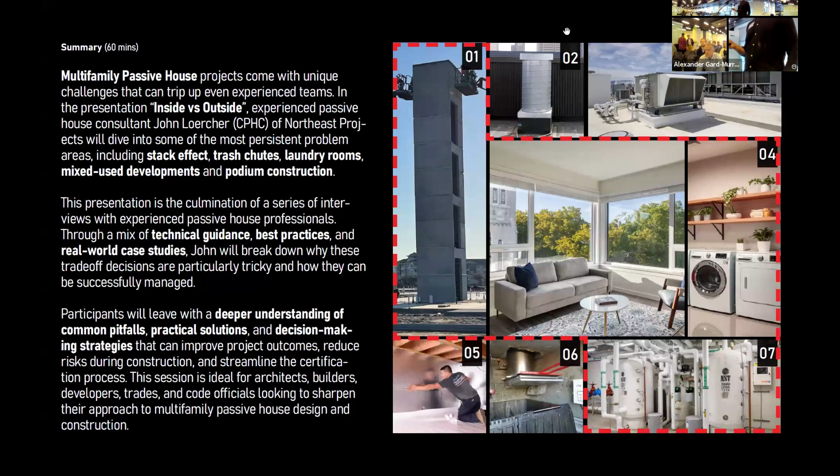Inside, outside - this presentation, as I was telling a previous student of mine, is basically a continuation of a research project that I've been toying with between my work at RPI, different scholarships and research initiatives, and now folding it into the CPHC training at Phius.

I'll go through some of these things quickly. Essentially, what we're going to be doing today is identifying and explaining some of the common challenges, specifically in identifying the passive house enclosure or passive house envelope, depending on terminology, within big buildings. We've seen a lot of this discussion in smaller single-family buildings, but we're trying to collect strategies being seen in larger buildings as multifamily residential really takes off, especially in places like Massachusetts. Even at the Phius non-res summit that just occurred, we're seeing a lot of larger non-residential buildings happening as well.

The second learning objective here is we're going to look at some real world case studies, based on work that's actually complete, final certified projects. We'll go through some technical guidance - even though we're not necessarily showing the same project case studies over and over again, the idea is to abstract some of these inside-outside principles so we can apply them to different projects.

Then we'll talk about how the Phius certification process really factors into this as well, because there's a lot of detail about what you choose to be inside, what you choose to be outside, how that affects design processes, verification processes, et cetera. Construction phasing is a big one here too.

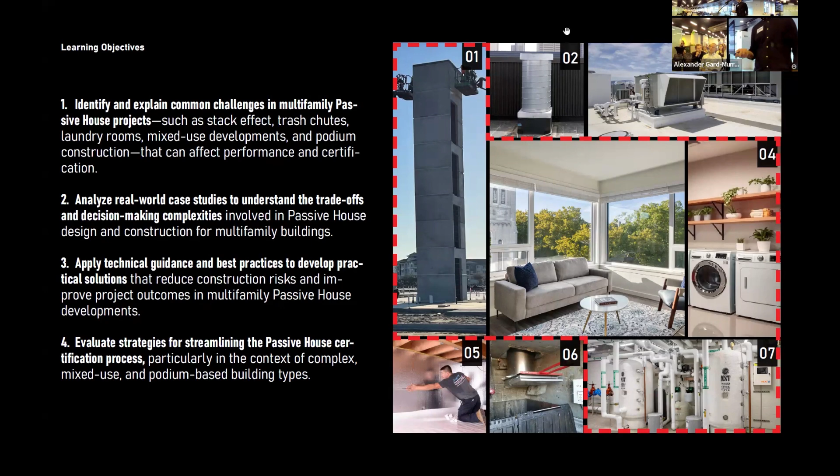Phase one is an in-person CPHB course, which will be released this upcoming July in Seattle. The first virtual classes of this new curriculum will be coming out in August, so please look out for that.

The new curriculum is really top-notch, and a lot of it is because we're not just focused on small buildings anymore. That's the number one comment from CPHC students: enough with the Larson trusses, enough with the tiny single family buildings, we need to learn how to do big buildings now. And there are a lot of differences involved.

Michelle was a contributor, James Peterson was a contributor, and a number of other people gave us their time and spoke about project experience to feed into this whole presentation. So now for the actual content.

First, we need to go through a couple prerequisites to get more specific with our language when discussing some of these issues. From there, we'll go into ground conditions, vertical shafts, and exhaust ventilation. These are basically the three categories I'm using to pull out some of these inside-outside trade-off decisions.

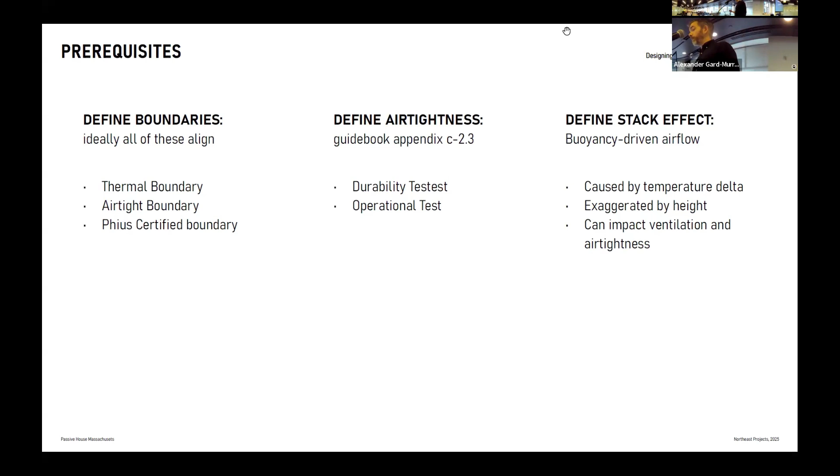Lastly, a really important thing: in big buildings, in all buildings, we deal with stack effect—essentially buoyancy-driven ventilation or airflow, because hot air rises. That becomes enough of a factor in large buildings that we actually have to start speaking about it a bit more, so we're going to talk about that as well.

One of them was a crawl space, the other was a mechanical basement. So even though they're not in our PHIUS enclosure, it doesn't mean we're necessarily off the hook for those—we still need to insulate, air seal, etc. So now we have these primary and secondary, maybe even tertiary boundaries that are all interacting.

We need to make sure we're tracking those both through design. How are our details being drawn to communicate this? How is our construction being phased to make sure these things are continuous where they need to be? And then how are we verifying those things?

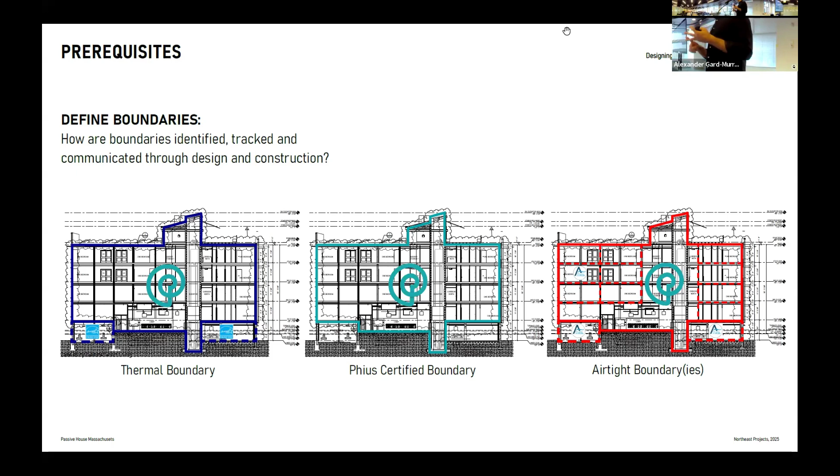This is where it gets really important to plan and really think in 3D. We've been seeing more 3D thermal bridge analysis, which is really amazing. But I'd say we have to take an even further step back and actually look at the massing of our buildings and the programs, how they fit together, to really understand where that mechanical room is that's outside of the enclosure.

How does that connect to a trash chute? How does that connect to the elevator, or not connect to the elevator? So we get this kind of complex Tetris game, especially if you have not straightforward ground conditions that really need to be tracked throughout all of this.

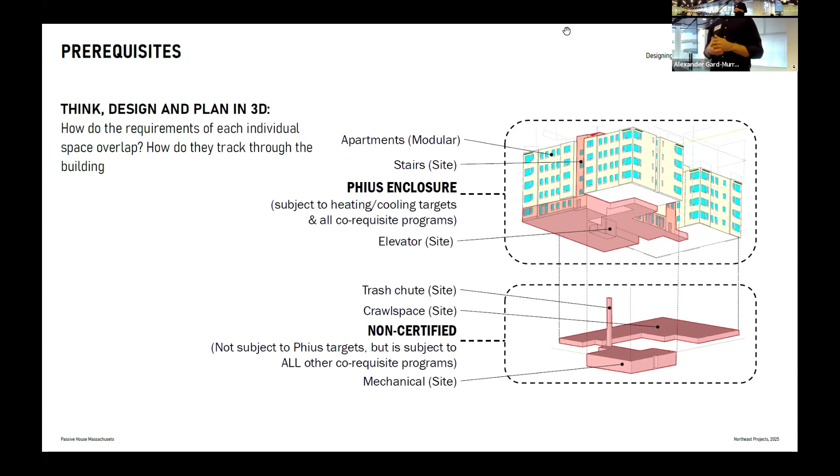Okay, so the next thing we're defining is air tightness. Most people in the single family world aren't really worrying about this so much, except for the PHIUS raters. I think this gets even more emphasized as a concept in larger buildings, because as we add more appliances and things that can actually be taped off in certain circumstances, that can add up to make a big difference in our building air tightness reading.

So we have our operational test first, and all of this is defined in the PHIUS certification guidebook, appendix C 2.3, if you're interested. The operational test is for everything in its natural position, so nothing can be taped, everything has to be how it is. This gets really interesting when we're talking about appliances, like a direct exhaust dryer, because if you don't have that purchased yet and installed, you have to leave that duct open for the testing, versus if you have it installed, you might be able to rely on the air tightness of the dryer itself to improve the overall air tightness of the building.

We also have our durability test. This is the tape test that we're going to hear about from our PHIUS raters and verifiers. This is also what we're using for the WUFI or the PHIUS targets. It's important for the CPHCs to understand that the number we're plugging into WUFI at the end is actually based on that durability test, which is our taped test. Having that number, especially in a large building, these two numbers could actually be quite different. We need to know as CPHCs which one of those we're pulling into our energy model to show PHIUS compliance.

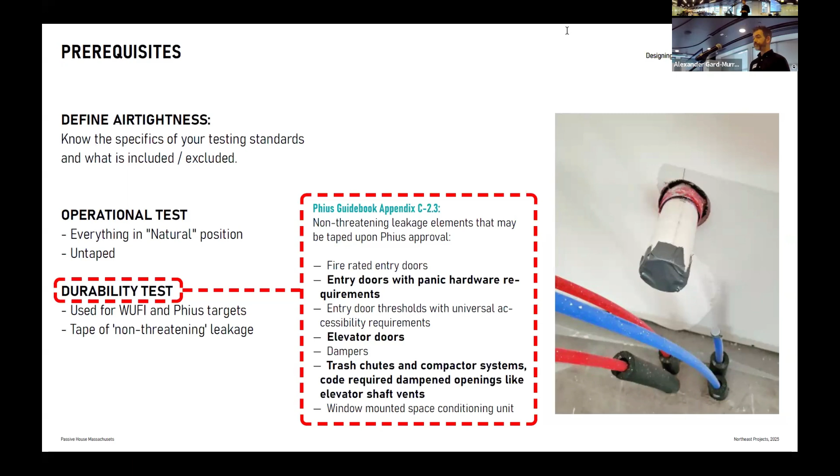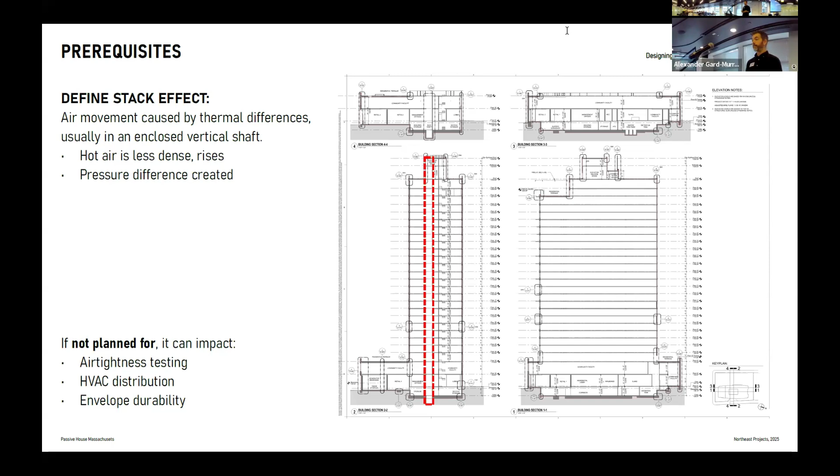Okay, and the last prerequisite I want to speak about is the stack effect. This is a section from 425 Grand Concourse. You can imagine any continuous vertical shaft in a building like this is going to be dealing with some degree of stack effect. This is based essentially on airflow from over a vertical shaft and a difference in temperature between the top and the bottom of that shaft.

It's also important to show that the stack effect isn't going to be a uniform effect applied to the whole building equally. It will actually have positive pressure in some areas, essentially the top half of the building, and negative pressure on the bottom. So there's going to be certain exchanges or interactions that happen as you're going floor to floor through the building. That magnitude of pressure might not be so bad in the middle of the building, but it might be something that really is causing a problem towards the top.

So you can imagine you put an ERV on the top of this building and you're ventilating all the way down to the first floor. At a certain point, you're dealing with going against positive pressure, and then you hit another point and eventually you're dealing with negative pressure. I'm not an engineer, so these are just the basic fundamentals here, but you can imagine how this would become an issue in a project.

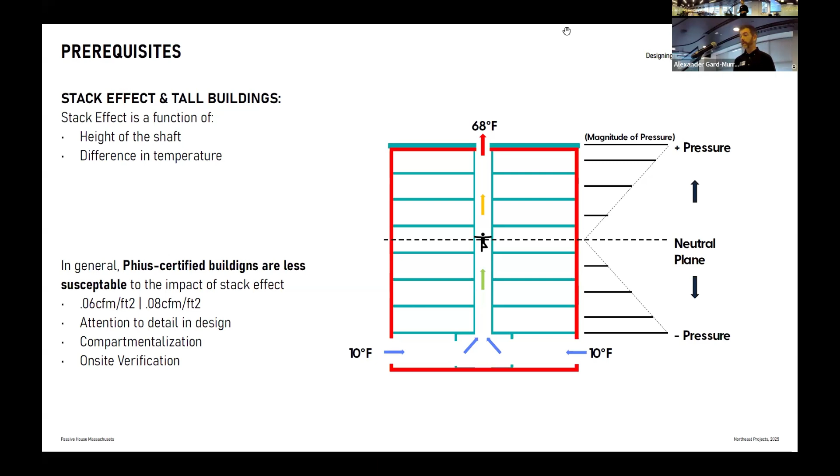Again, passive house buildings are generally less susceptible to this in general, but we will still open windows. We're going to be dealing with elevators going through your PHIUS enclosure down into a parking garage, and we need to be aware of this effect. It's only going to get worse in more extreme environments. So a milder environment or outside temperature range, you're going to have less stack effect. If we have a lot of internal heat gains and a very cold temperature on the outside, we're going to deal with more stack effect. So it's going to be very climate specific, just like all the other PHIUS protocols.

So those are the prerequisites, the things we need to define in order to discuss the rest. The first main category I want to go into is our ground conditions, starting at the bottom and working our way through the building enclosure.

Bringing back some of those diagrams from earlier, if we look at basements and crawl spaces first, we're seeing in more and more multifamily larger projects that there are spaces cut outside of the Phius enclosure, the certified enclosure, within the building. This might be occupant storage spaces, bike storage, some mechanical spaces, garbage chutes and garbage compactor rooms.

In this particular project, Lamora, we had a crawl space because it was modular, so we needed these piers for the modules to sit down on. Going back to that Phius enclosure was really important. When you conclude you're going to cut a space out of the Phius enclosure, it's easy to think you're off the hook and don't have to worry about this space, but that's actually where you have to start deferring to some of the co-requisite requirements.

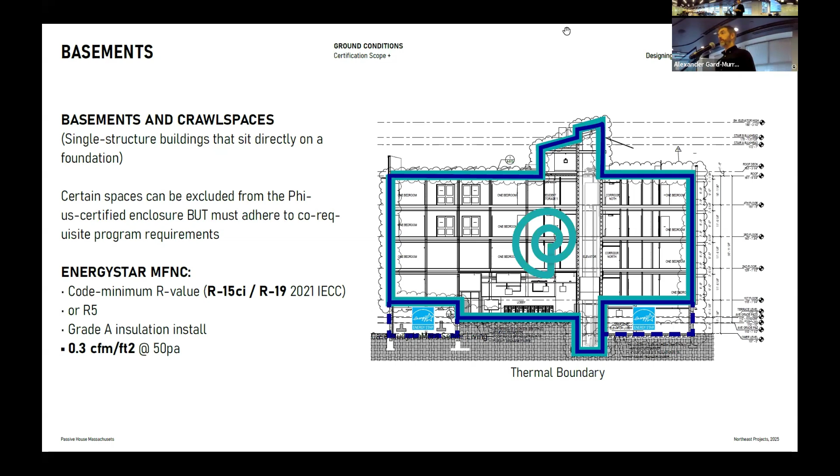The Energy Star multifamily requirements aren't too burdensome. They have a code minimum value, and if code doesn't prescribe that, they say it must be at least R5, so you do have to do something regardless of what building energy code you fall under. The two more significant things are that you still have to pay quality attention to how your insulation is installed, you can't just do a quick and dirty job down there, and you still have to meet the Energy Star requirements for air tightness. These are all areas of additional detail and concern.

On top of that, we still have the EPA Indoor Air Plus requirements. Again, not a Phius certified space, but we need to deal with that air tightness limit, compartmentalization, duct leakage. And there are actually some pretty specific requirements for moisture control, humidity control, and ventilation.

Even in the case of this project, we just have this 3-foot crawl space with a bunch of piers, but now we have to condition it. We need to dehumidify it, insulate it, vapor seal it. So the trade-off is, was it really worth it to do that? The conclusion's kind of still out.

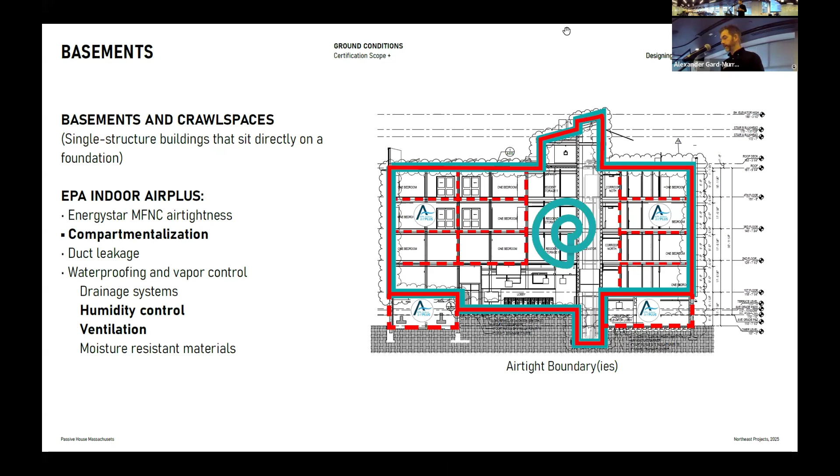Okay, so those are for some basic conditions. Obviously we need to deal with podium construction as well for large buildings, a common typology. The first one at Phius that we really saw was, well, actually 425 Grand Concourse was where this really started to come into the perspective as something we really needed to figure out a little bit more.

Podium construction, or pedestal or platform, is essentially when we get division in structure. There are fire resistance benefits in that we get a very robust, fire-resistant structure on the bottom, and then we can switch to a lighter construction type up above, which is more cost effective. Typically on the bottom in that fire resistance section we'll see something very conductive, like concrete or steel, whereas up above we get our more standard, maybe wood, thermally broken, more thermally durable details.

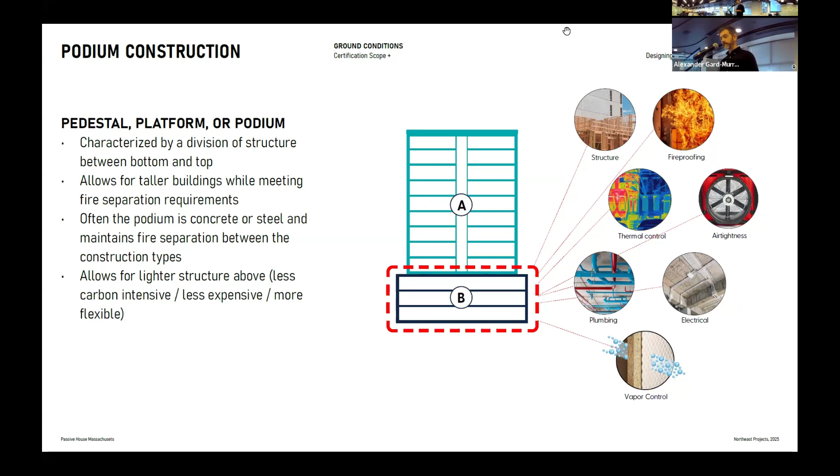We're essentially given this trade-off decision where we either have to insulate below that podium or insulate above it, and it has pretty significant impacts on how we actually detail this. Finch Cambridge is on the right here, and on the left is Barry Farm, contributed by Michael Hindle. You can see the dashed navy blue line is the podium slab, and the red dash is where we're actually pulling that insulation down to interact with the slab itself. So we have to deal with utilities that are potentially either interfering with this insulation space or penetrating through it.

Essentially, either way is not totally perfect. There's going to be certain transition details that you have to deal with on either side, especially how to penetrate and seal, considering those fire ratings. Dealing with corrugated steel deck, that's not necessarily a flat plane, so you have to think in 3D.

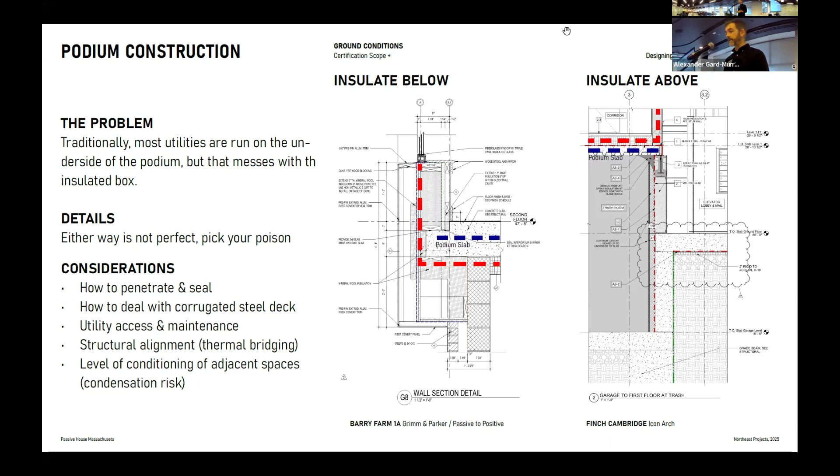Structural alignment: can we actually design a building that has a structural offset when we transition from the top of the podium to the bottom of the podium to help reduce thermal bridging? All of these three-dimensional thinking aspects really start to play into these decisions.

Insulating on top will certainly simplify our air sealing and thermal continuity, and it tends to be more forgiving with thermal bridges, because we just get a nice insulated box and sit it on top of another box. But as this diagram shows, that's not always the case—there are elevators, service shafts, different reasons why we have to penetrate through that podium, and that's where these tricky details start coming up.

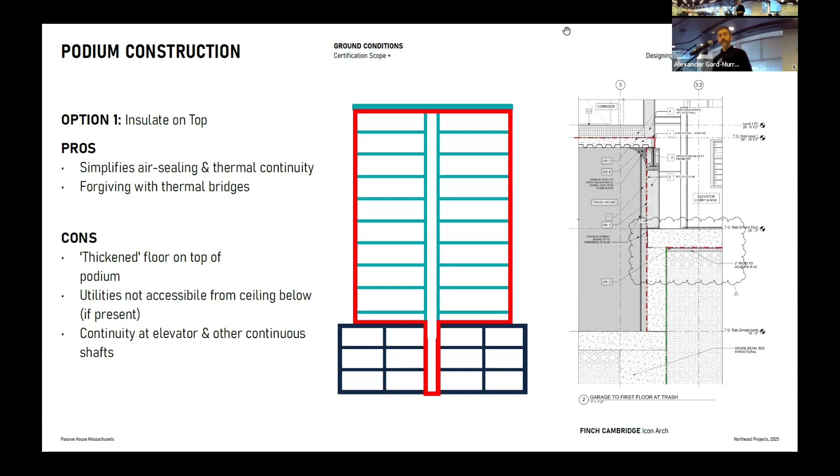The downside is that we're already fighting for height in our buildings, fighting to get the maximum amount of floors within our zoning limits, but now we have to add additional thickness to that floor. So that transition from podium to up above really ends up taking some space. We might cut off access to our utilities from the ceiling below, and now we have a situation where we have to access utilities from the floor, which is not ideal from a building maintenance perspective—and again, that continuity of all the shafts through the building.

Our second option would be insulating below, and as you're dealing with the structure, this tends to get a little more complicated. You're going to have to break that continuity of insulation as you go from top to bottom, just to pass through that podium top. You also have to deal with all of the structure of the podium itself—if the underside of your slab isn't completely flat, you have to make your way through all that kind of origami. The pro is that it does eliminate some of that additional building height, essentially collapsing that height if that becomes a challenge or constraint you're already working with in your design.

And a lot of the other air sealing difficulty around deck, et cetera, is important here as well.

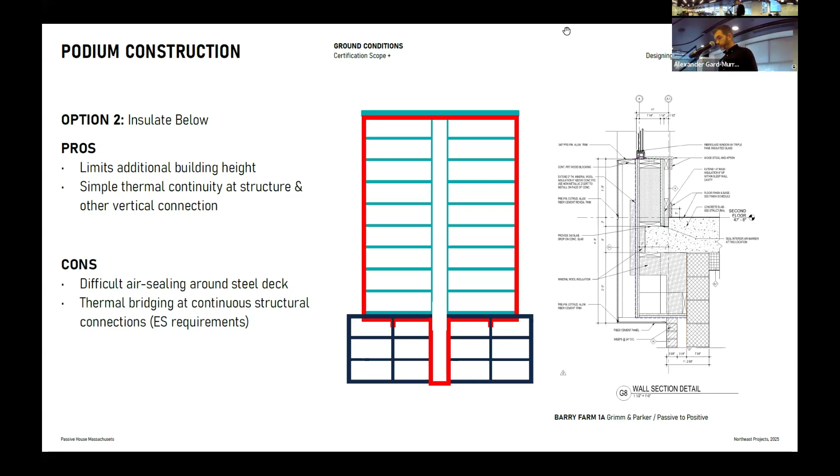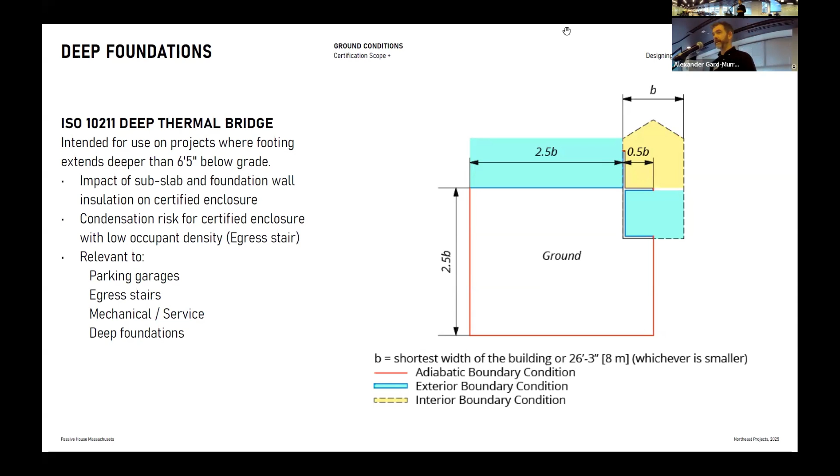One last thing about our foundation conditions: we're starting to see the limitations of the current PHIUS perimeter thermal bridge analysis that we recommend. There's a new protocol now for PHIUS deep thermal bridges, following ISO 10211, which widens the scope so we can account for multi-story parking garages, et cetera. It's based on the width of your building—the wider it is, the more ground you have to model in your thermal bridge condition. It has given me significantly different results in my thermal bridge analysis, so I'm recommending this to all project teams. If you want the protocol and it's not on the PHIUS website, let me know and I can send it.

So we established the ground conditions, the inside and outside spaces, as we start to build the building up, and eventually we get to our residential, more repeatable units. But we still have to have things go up and down through these repeatable units.

If you come from an architecture background like I do, there's a lot of poetic language from writers about these vertical shafts. One of my favorites is Reyner Banham, from University of Buffalo, talking about the Larkin Building, one of Frank Lloyd Wright's buildings, calling it a stupendous piece of rationalized architecture and a triumph of industrialization.

He's really romanticizing this vertical transportation, a utilitarian aspect of the building. So I'm trying to make a play for how we can make these mundane mechanical parts of buildings, like trash chutes, a little bit more interesting. The detailing aspect is really what makes me say, okay, fine, I'll work on the trash chute detail today.

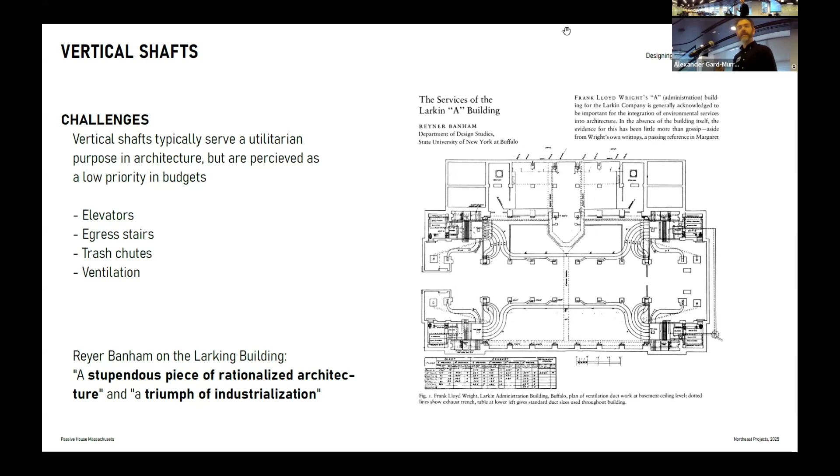So talking about these things with this mindset, specifically the things we're really dealing with are elevators, egress stairs, trash chutes, and ventilation.

I'll say off the bat, elevators are easy. There's really not much reason to cut them out of the certified boundary. Some early multifamily buildings in PHIUS certification did cut them out, as well as egress stairs, and I'd say probably to the project's detriment. I haven't found much reason to cut these out of our certified enclosure unless the building already has such low density that it somehow needs to shave off interior space—again, usually not a fit for PHIUS projects.

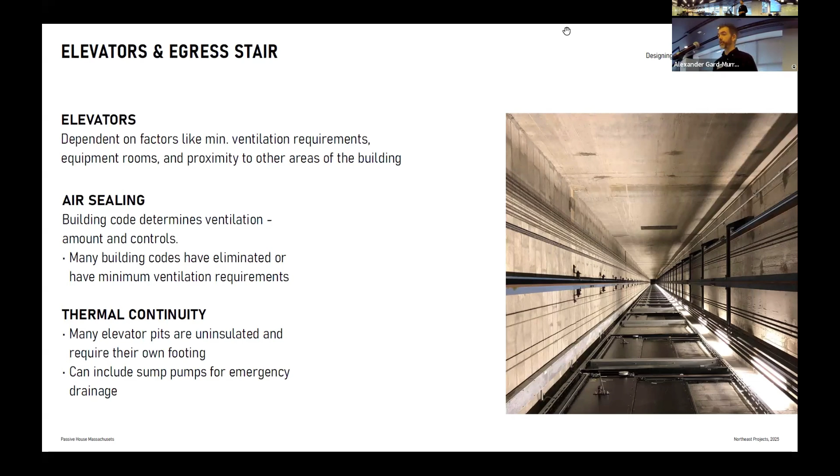The big thing to look at is just verifying ventilation rates at the top of the elevator. Most building codes we're dealing with now have minimal or no ventilation requirements at the top of the elevator shaft, so it's not really an issue. This is a theme we'll come back to with trash chutes, which are quite the opposite.

Egress stairs, very similar—the thing to look out for is that even though it's part of your PHIUS enclosure, and I'd recommend keeping it part of your enclosure even though it might come all the way down to the ground floor, you don't necessarily have 68 degrees Fahrenheit heating and 77 cooling in an egress stair, especially when it comes down multiple floors.

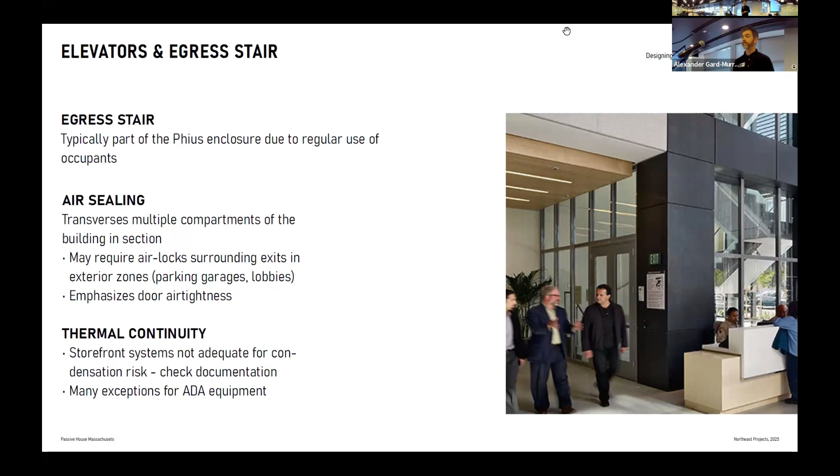So we're looking for thermal bridging potential and condensation risk, especially in areas we say are fully occupied but aren't really fully occupied sometimes. Looking at occupant density and actual usage of egress stairs can get important. I've seen many egress stairs going down a couple floors actually fail condensation risk analysis under the ISO standard, just because it's so far away from the rest of the conditioning systems of that building. But generally, elevators and egress stairs are simplest to just keep inside the building.

Now, trash chutes, the cousin of our elevators, are going to be a lot different, because we need to maintain a negative pressure to get all the trash odors out of the building. This is very much split right now as far as what practitioners are doing. Some people are literally cutting that trash chute out of the PHIUS enclosure—we call that the donut hole approach.

As you can imagine, there's a big challenge in that. Now you have a piece of your exterior enclosure on the inside of your building that you have to crawl up to make sure everything's continuous. There's also liners that go in there, and it's trash, so it's going to get banged up inevitably in the process.

We also have option 2, which is all out—considering the trash chute outside of the PHIUS enclosure. All in, we're seeing more and more. The all-out approach, I thought, was kind of a fear-based approach that a lot of people used early on in these big buildings. We're seeing more brave practitioners now—probably Galen Staengl is one of them—really forwarding the idea of just keeping the trash chute in the enclosure. He was very encouraging, like, yeah, it's possible, let's figure out how to do this, which we'll go over in a minute.

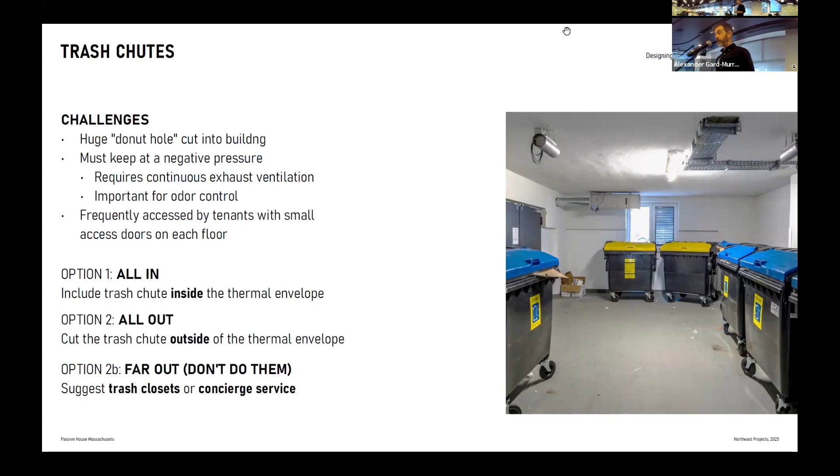The interesting one I call option 2B, the far out—just don't do trash chutes. Get a trash service or something like that. I'm not going to give it too much lip service in this presentation, but there are project teams that are legitimately pursuing that.

So for the inside, and I think this is the more interesting approach that I would really love to try out on a project, essentially we just keep our simple enclosure around all six sides of the box. We keep our trash room, the compactor room at the bottom inside the Phius enclosure, and then the trash chute is inside the Phius enclosure.

The downside of that is we have to continuously ventilate out the top, which is creating negative pressure. So what is essentially being proposed in a strategy like this is putting its own ERV at the bottom in that compactor room, which relieves some of that negative pressure by making that a balanced space itself. So you have the bottom being a balanced space, and then you're dealing with really just the shaft.

You're essentially sucking in air from all of the trash chutes themselves, so you have that airflow coming in from the individual floors, making its way to the top, and then out the top. If we can actually quantify and minimize that as much as possible, really just sticking to the code minimum, depending on the size and density of the building, essentially you can determine that it's an energy hit that you're willing to take.

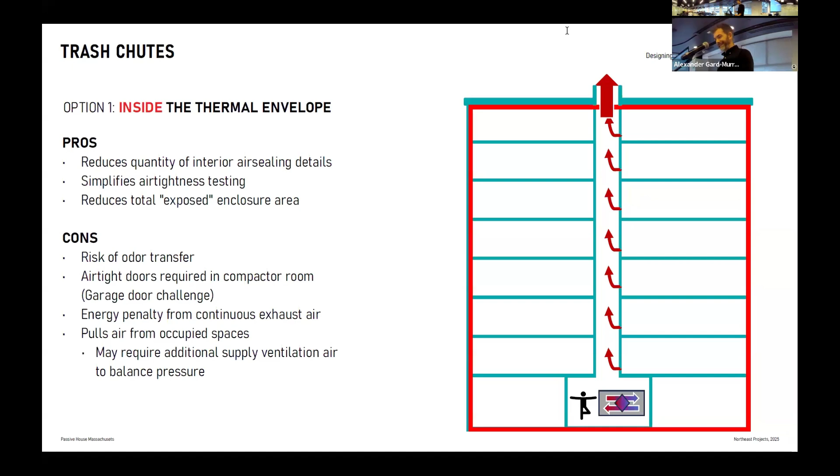Yeah, I think that's it for that slide. Okay. There we go, that's a little redundant.

The second approach here would be putting this outside of the airtight boundary. This is actually what I have some not-so-great experience with. It ended up being fine on the projects I've done this for, but not without a little help from AeroBarrier and Aeroseal. It just gets really, really tricky to seal that shaft all the way up.

So this is a positive because it minimizes odor transfer. It minimizes the thermal loss aspect, and also the energy loss of that continuous ventilation. It's just its own isolated kind of area.

That creates a lot of problems at the bottom, at the trash room, because now you need... I'm sorry, you do not need airtight doors for this situation, which is great when you get these big rolling, overhead doors that are just really a bear to air seal.

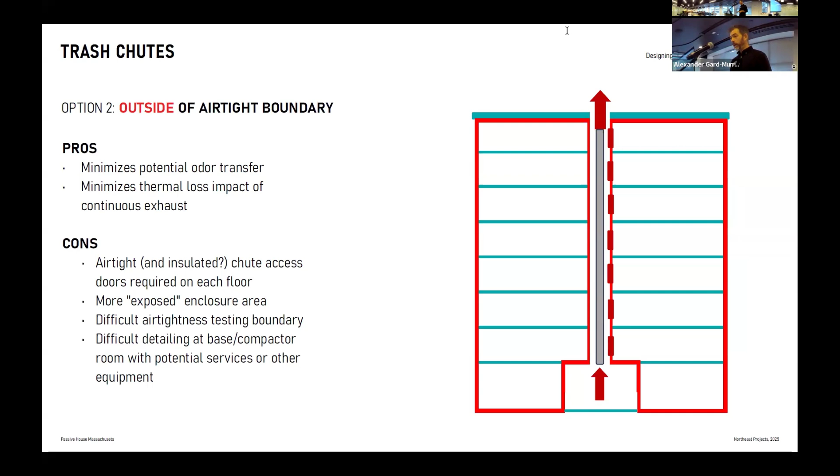Now, the last type of vertical shaft is really when we're thinking about centralized ventilation. So essentially, as we're dealing with both providing the same amount of ventilation down sequentially, down a vertical shaft, as well as dealing against that stack effect ventilation, we need to come up with some sort of balancing strategy.

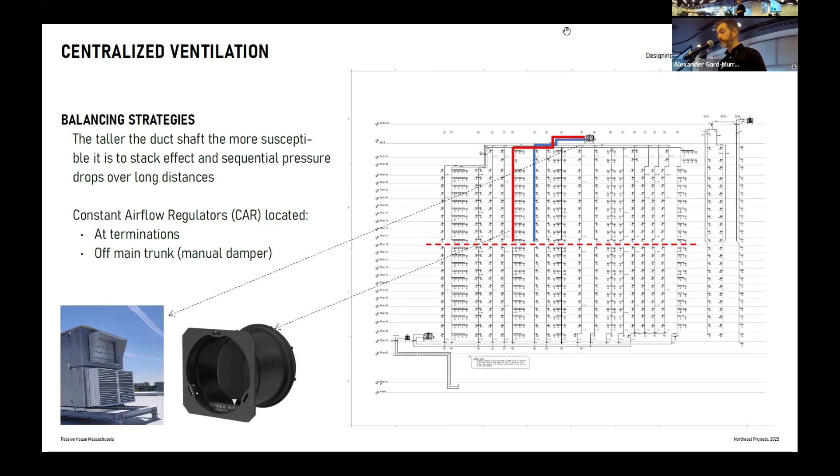So the taller the duct shaft, the more susceptible we're going to be to stack effect, even though that air is isolated in a duct. Primarily we're using constant airflow regulators to do this work, but there's still kind of smaller strategies within this CAR damper strategy, so that's what we're going to go into here.

There's a big debate out there, and this is where I'm hoping James can maybe chime in later, about the use of automatic or manual CAR dampers, self-adjusting CAR dampers versus manually adjusted CAR dampers, but also where in line in the ventilation system these are actually located.

So in the first option, option A, using an automatic damper at each individual termination, you're going to have more of these CAR dampers, but they're accessible right at the actual diffuser itself. Whereas a different option might be just using a manual unit floor to floor, and that allows you to manually go through as you're testing and commissioning the building to essentially, in a less nuanced way, start to manage every 10, 12 feet or so as you're going down the stack of the actual building.

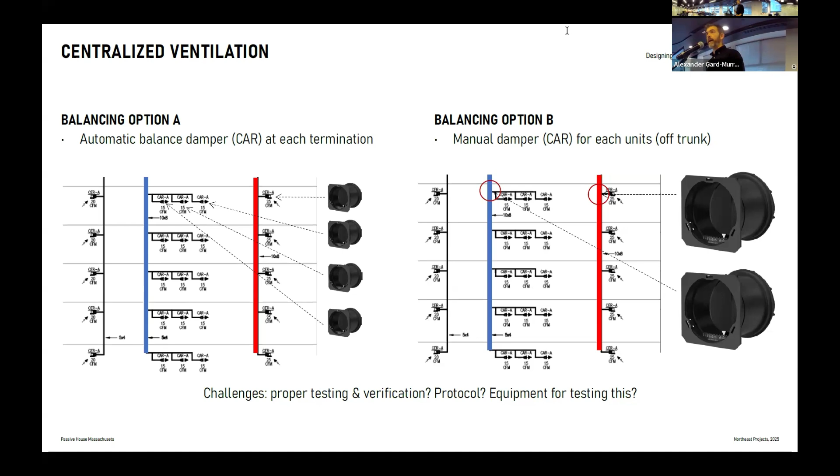I'd say this is worth bringing up because even though some of these solutions are fairly obvious, the real challenge is in what is the proper testing, proper verification, and proper equipment to use. This is probably one of the most open questions for me reviewing projects with PHIUS—as projects get finished, what is the most effective strategy here? It might even come down to team preference.

And then there's always the option of just not centralizing your ventilation, so you're not dealing with this shaft issue by even semi-centralizing your building.

At least in the previous version of the CPHC, we talked a lot about individual units in multifamily buildings—unit by unit ERVs or ventilation systems, versus centralized. We're starting to see more projects with semi-centralized systems, where there might be a ventilation system per floor, or as we're seeing here, a set of three floors, based on the capacity of the ERV.

What's nice is we can start to overlay this with the compartmentalization strategy for the building, or the blower door testing strategy. So we're collapsing the work of the verifier who has to figure out how we're going to test this thing at the end, and the design professionals upfront figuring out compartmentalization for Energy Star. We're bringing them together so it's working as one clear system from start to finish.

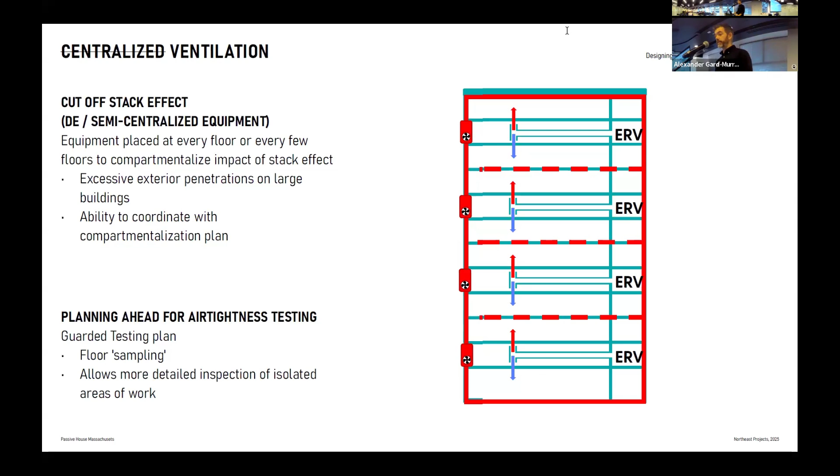This is really my buddy Tony Lasanti, the PHIUS QA/QC manager—he always hammers this in: get the verifier in early, get the verifier in early. Having them walk through some of these air tightness and testing strategies with you can actually lead to great streamlining in the design process.

All right, coming to a close here. These next ones I'm going to go through a little quicker—a lot of the same stories we all hear, and I know you're all pretty experienced in this room. Exhaust ventilation.

The field of indoor air quality and exhaust ventilation is constantly changing. In the past couple years, we've seen a lot of reports about indoor air quality and why we need to be direct venting our kitchen equipment specifically. We're dealing with things like energy loss through exhaust ventilation, how that impacts air tightness as we seal our buildings, makeup air—bringing cold air in to maintain balanced pressure—and in bigger buildings, what equipment is even available to us, since heat pumps aren't necessarily available for commercial venting equipment.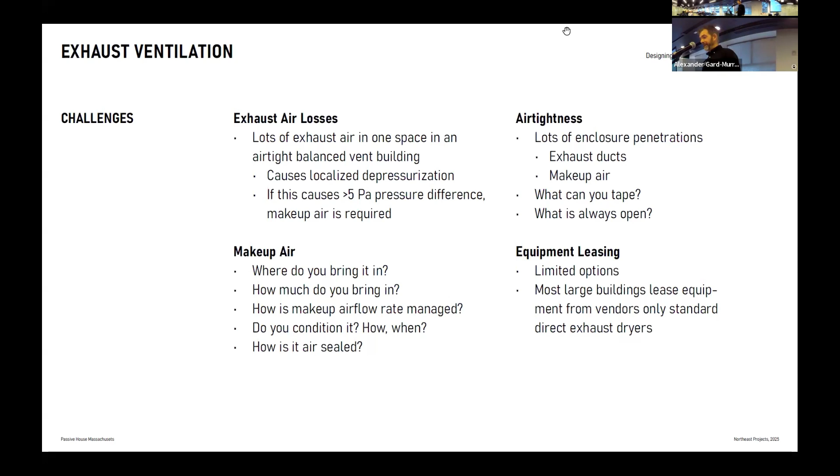I actually think it would be a great business idea to just lease heat pump dryers for commercial buildings, but that's another idea for another time.

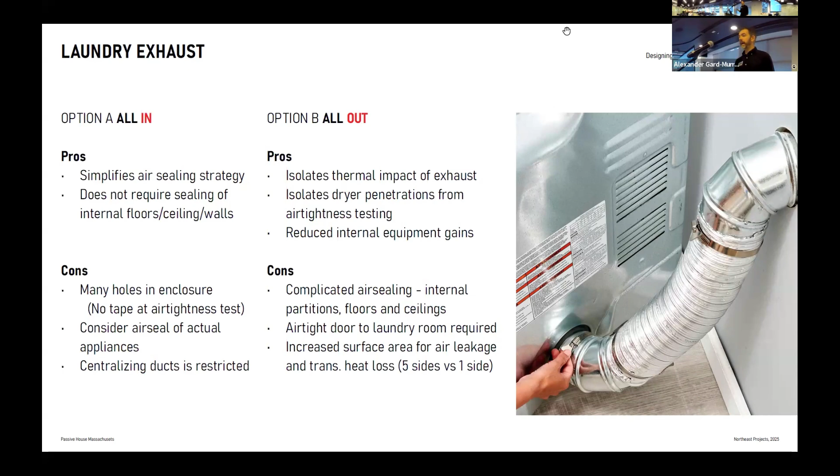Our laundry exhaust—we're really looking at all in and all out. This gets really interesting for me, because it's a very classic problem in passive buildings with direct exhaust dryers. In single family, we just put in a heat pump dryer, easy, but that's not always the case for larger buildings.

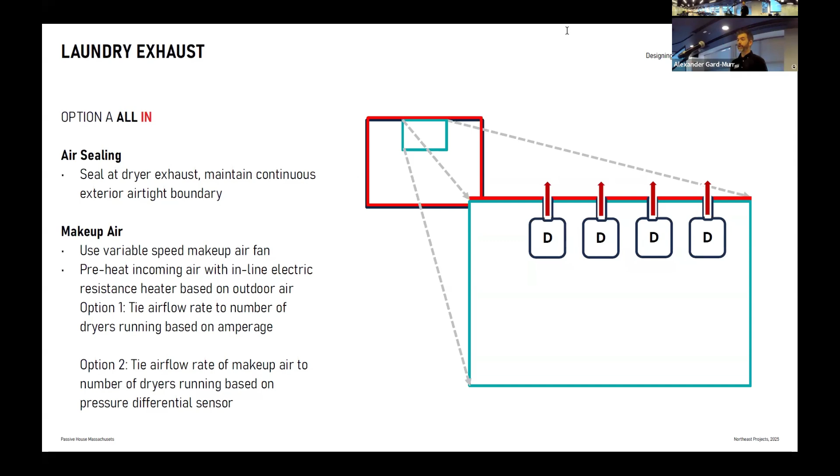So probably the most streamlined way to do this is just keep it inside the passive enclosure—you're dealing with a couple dryer vents, you have to seal all of them, and you probably have to do makeup air and bring cold air in to balance the pressure in the building. We're starting to see some variations of this.

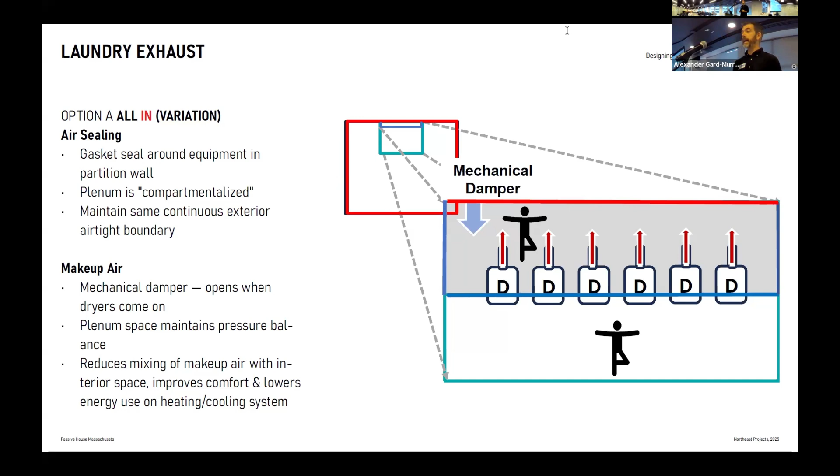But it's drawn very simply here in this diagram. It's not that simple, right? You need to build the wall so your dryers can fit into it. It needs to be gasketed around the dryers. So there's a lot of figuring out that needs to occur. But this is, at least from a comfort perspective, a solution that we're starting to see in some projects.

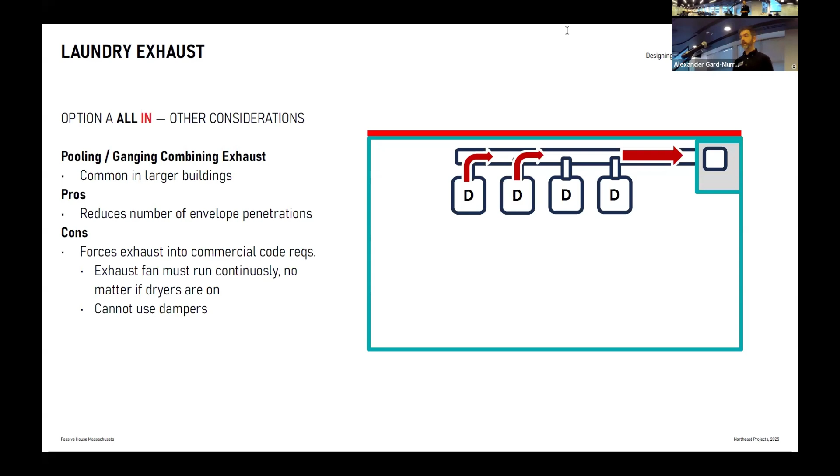There's a lot of questions about, well, why don't you just centralize your dryer vent? Then you just have one penetration through the building. That will put you into a commercial exhaust requirement, which is going to trigger some things like continuous exhaust, not using dampers, etc. So we have to be careful with how we're designing these as well.

There are some projects, especially earlier on in multifamily buildings, with kind of a fear-based approach here where it's just like, all right, forget about these washers and dryers. We're going to cut them out of the PHIUS enclosure altogether. This makes a big difference in the certification process because you just don't have to deal with it, right?

But from a constructability perspective, is this really the right decision? Now you're taking five sides of the box that you have to air seal and you're bringing that air barrier inside. You need to seal the doors into that laundry space. So it gets a little bit more complicated in order to do this.

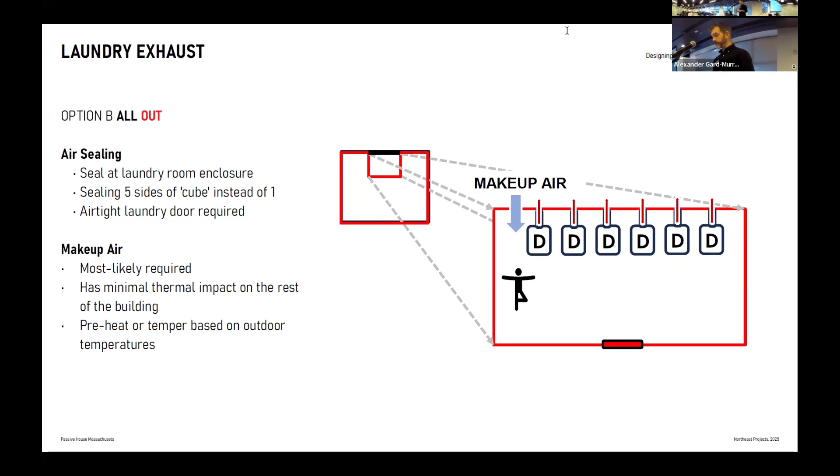Okay, I'm gonna skip through the kitchen exhaust so we can make sure there's time for questions. I will say that note that you still require a continuous ERV exhaust in addition to your range hood as well, whether it's direct exhaust or recirculating.

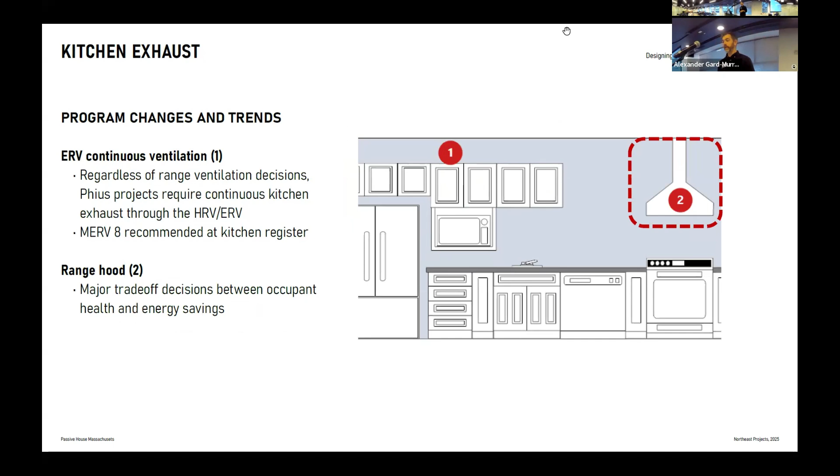And I will say that the programs are actually changing, right? So we're going to see single family projects actually requiring direct vent in the not so distant future. So this to me is a really interesting trade-off because we're talking about energy performance versus occupant health, right?

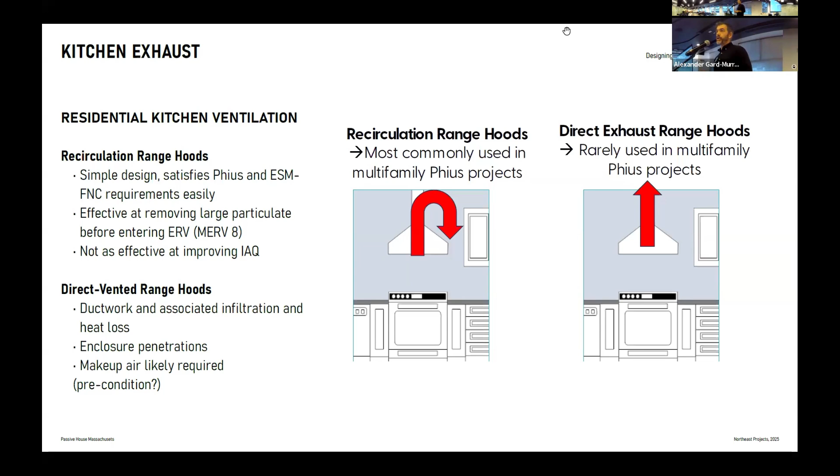So I don't know, I'm still kind of struggling with it myself. What are the real priorities here? Maybe it's a case-by-case thing, but I know that personally I would want to install a direct vent range hood in my own home. So I think that's one of the bigger challenges now: how in multifamily buildings where we have 40, 50, 60 units that are all directly vented, how do we do that without incurring such a large energy hit that we can't pass our PHIUS targets?

So challenges out there. Last slide that I'll end it on is just kitchen exhaust. This is like a big one—we're just seeing it cut out of the PHIUS enclosure altogether, to the point where I've even seen larger multifamily communities just having a separate building where they have their commercial kitchen and cafe area.

There are options for heat recovery ventilation in a commercial kitchen, but they tend to be cost prohibitive, overcomplicated, etc. So we have yet to see a certified building go through with that heat recovery in the commercial kitchen.

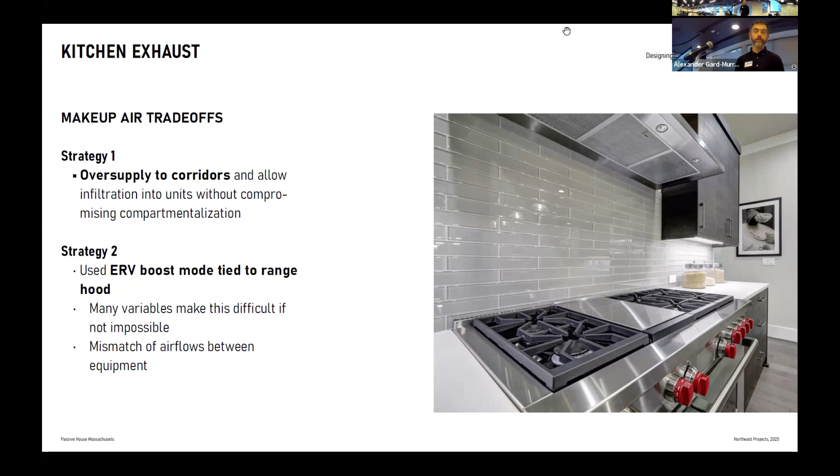Okay, all right, so that would be my last slide. Again, there's a lot of different aspects or flexibility about how you define the PHIUS enclosure, what's going inside of it and what's outside of it. To me, it's all about those trade-off decisions. So I don't think there's necessarily a right answer or a wrong answer that applies to all projects. But really balancing those trade-off decisions and figuring out what makes the most sense for the particular project that you work on and the team that you're working with is my recommendation.

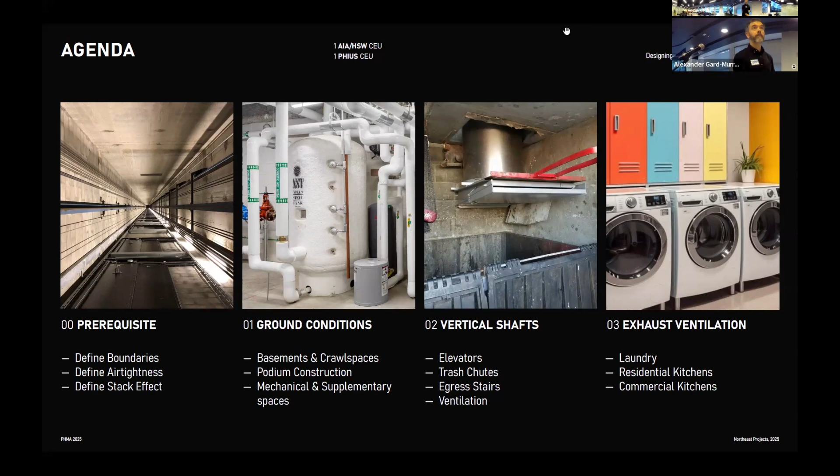One right answer is bring the verifier team in early. Yes, do that, that's always the right answer. All right, we're gonna take questions from the audience and online, trading off. Anyone in the audience here want to start us off? And if you just say your name.

Yeah, hi, I'm Abigail Sabo with SH. I have a question about trash chutes. So you talked about option 2 or option B, I think you called it, where it's all out. And you said you tried many different things to get it airtight. Yeah, to get that shaft wall airtight. Sure, and you mentioned you ended up with AeroSeal, but I...

Curious what things you tried and how that went. Yeah, that's a great question. Oh man, it gets technical quick.

So basically we had this CMU trash chute, whatever the dimensions were, and it was built all the way up, and we sealed it with a liquid applied all the way up. It was actually built kind of like a U. They sealed it, and I don't know how the phasing worked for that, but they did seal it with liquid applied on the interior.

I think there was a lack of understanding of what that trash chute liner really does and how it connects to everything else, right? Because you have to build the physical structural chute, and then typically there's like a metal duct that lines it. So now you have a duct inside this larger chute, and you have to consider how each of those ducts are transitioning at the trash chute door.

So what we actually found in Lamora was that we had spent all this effort sealing the shaft, sealing the CMU shaft, but what we really should have been sealing was the liner, right? Because it was the liner that was connecting more solidly to the trash chute doors. And that was also just like the equipment that we specified.